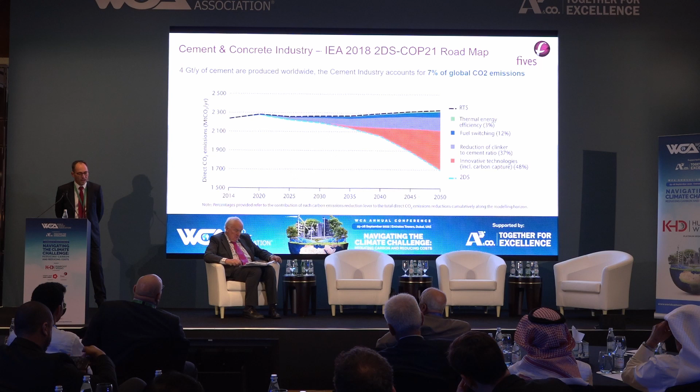I'll share a survey done by the association that also splits CO2 emission savings into families. One is operational excellence, including energy efficiency. Another touches the product portfolio, where we're a little concerned about market acceptance - we could smile about the reddish cement question around the use of calcined clay. But this is the product portfolio, and it's variable depending on the area. Then there's the use of alternative fuel and possibly waste heat recovery. All these categories provide significant abatement and are all existing, available technologies.

Looking at Fives' technologies, we've divided them into two categories. This one is called short term, mainly because it has already been applied for more than 15 years in many cement plants - we're talking about pyroprocess line efficiency. The last 50 years or more have seen wet lines converted to dry lines, and to dry lines with preheater and precalciner, so there's still room for improvement in this part of the plant.

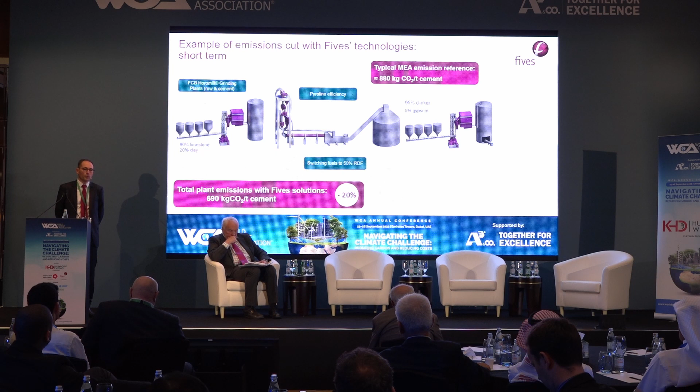There's also fuel switching - in this calculation, it's based on 50% RDF. Of course, there's the matter of availability and competition between recycling and burning, but the figure used is 50%. And grinding technology to save energy and water, and possibly increase the cement-to-clinker ratio. With this easy, already existing technology, more than 20% abatement is possible in the cement plant. What I'll introduce today and detail further in the second part of the presentation is the more recent development we've specifically made for these CO2 abatement ambitions.

One on the bottom left is the clay calcination. I will go more in detail, but this allows us to produce what is called LC3, cement containing only 50% clinker, so a significant saving in terms of CO2 emissions. Also, the evolution of pyroprocessing technology increases the possible amount of alternative fuel use in a cement plant, whether biomass or RDF.

And last but not least, concrete recycling. It's a business that is at the border between the cement industry and the construction industry. Nevertheless, there are applications that are more adapted to the cement industry, and I'll tell you why.

But with all these technologies, at the end of the day, we offer today the possibility to reach almost 300 kilograms of CO2 emissions per ton of cement, which is a strong push in terms of CO2 emission reduction. We say 65%. So you have a very large panel of solutions you can implement step by step, with different levels of effect, but at the end of the day which will allow reaching this ambitious target, with a limited amount of CO2 to dedicate to these new technologies that are known to be costly and energy intensive.

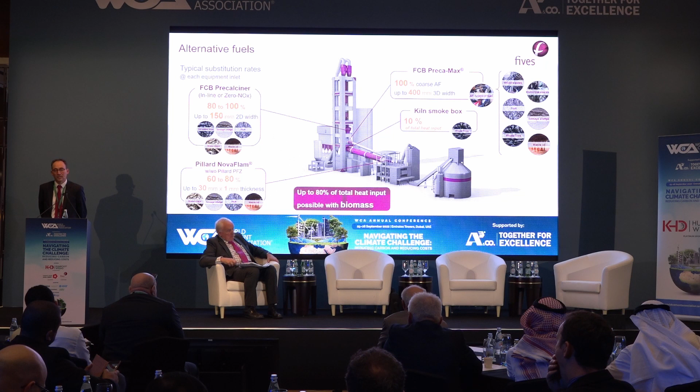Instead of shredding to 20 or 40 millimeters, you can put 400 millimeters in your cement kiln line, with an important substitution rate, because all these technologies together can allow up to 80% total substitution rate. But it's clear this also depends on the availability of your alternative fuel. The technology is there, that's the message.

Then, more recently, clay calcination. It's not completely recent, because FCB did a flash calcination plant in the 70s, so in terms of technology it's not really new. The use of kaolinite is also practiced in the construction industry for decades, but now this field comes into the cement plant.

So what we have done at FCB is give preference to flash calcination in comparison to calcination in a rotary kiln, to have a sharper control of the calcination degree, and thus doing grinding before calcination.

One of the significant advantages—we heard yesterday that we have huge amounts of clay available worldwide for calcination and to introduce in our cement. But clay has different qualities; some are more appropriate to calcination and to making cement, some are less.

Flash calcination gives you a wider span of possibilities because, having sharp control on the degree of calcination, you avoid starting a reaction of foreign or non-desired components in your clay that could be detrimental to the quality of your calcined clay. That's why we went to flash calcination.

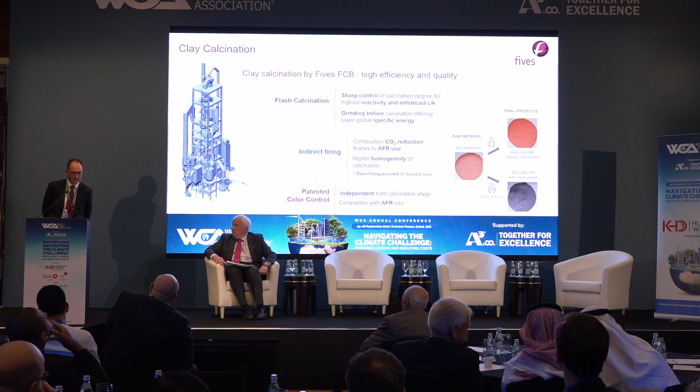So the last item is concrete recycling. We talked this morning about circular economy. We are typically in the circular economy, because the cement you produce is used to make concrete, and if you recycle the concrete, you get high quality aggregate to make concrete again.

You have sand to make concrete again, and you have cement paste that you can introduce into your cement kiln, within limitations given by the chemistry of your raw mill, but it can also be used as an additive for cement. The benefit is first that the sand, the 125 micron to 2 millimeter fraction, contains about 20-25% cement paste.

is also applicable here, and it's very virtuous because you have 100% recycling of concrete, and you can use this material either in your process or as CO2 absorption in a carbon sink. All these technologies are available and already used for decades, but just recently applied to the cement industry.

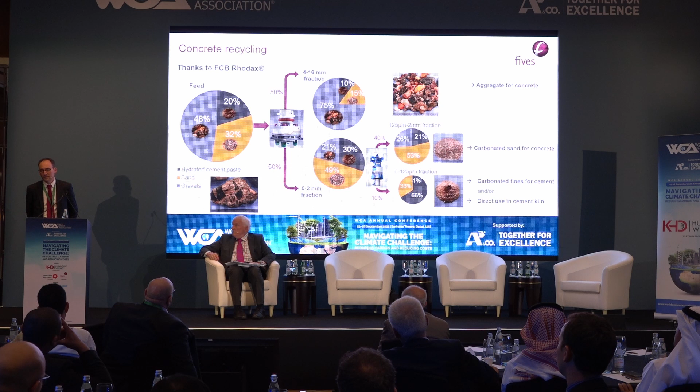Here we are. Merci beaucoup. Thank you very much indeed. You're welcome.

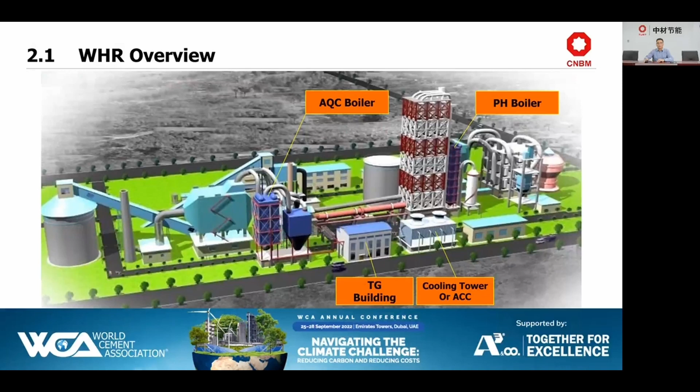Here somebody may ask, what is WHR? In the cement plant, one typical WHR system normally includes a PH boiler in the preheater side, AQC boiler in the cooler side, turbine and generator department, cooling water tower or air-cooled condenser, and chemical water treatment, etc. The waste heat source normally includes the waste gas from preheater outlet, the hot air from cooler vent, the radiation heat from the rotary kiln, and the waste gas from the bypass system, if any.

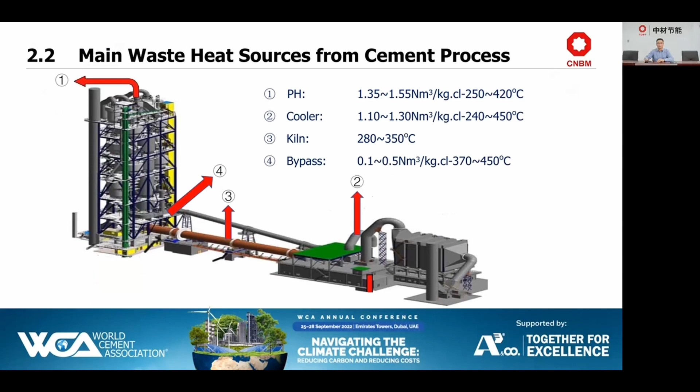About WHR technology, there are two main categories in the market. One is the steam Rankine cycle system, we call it SRC, and the other is the organic Rankine cycle system, we call it ORC. The working principle is the same, both based on Rankine cycle but with different working medium. For SRC, the working medium is water and steam, suitable for plants with rich water. For ORC, since the working medium is thermal oil and organic fluid, it is especially suitable for plants where water is in shortage. For cement plants with flue gas temperature less than 400 centigrade, the efficiency of both is almost the same.

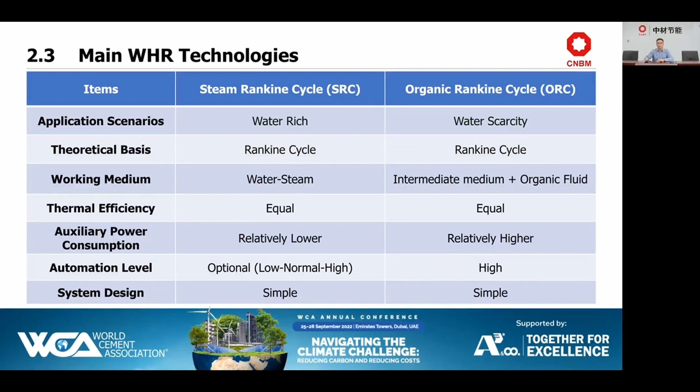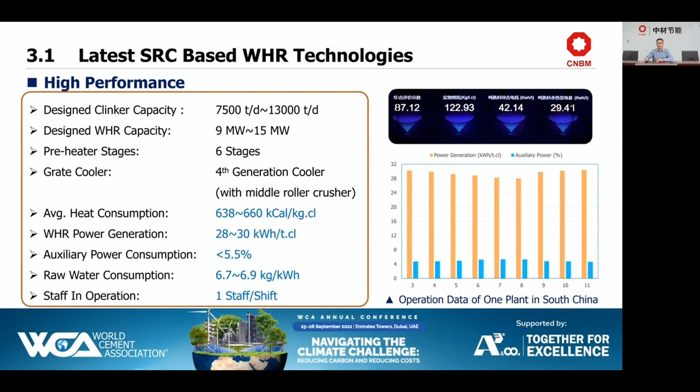Following, I will introduce some features of the latest SRC-based WHR technologies in cement plants. High performance: if the kiln system adopts a 6-stage preheater, as we know, the heat consumption is very low. Under such conditions, the power generation of the WHR system designed by us can still reach 28 to 30 kilowatt-hour per ton of clinker, and the self-power consumption rate of the WHR system can be less than 5.5%.

High-level integration: in our latest WHR system, the AQC boiler is one part of the cooler and shares the same foundation and platform with the cooler department. The AQC boiler adopts the bottom area inlet, directly arranged above the grate cooler and connected by the middle tapping solution. Compared with the last generation WHR system, the boiler inlet air duct becomes shorter, so the temperature loss and pressure drop get smaller. The PH boiler intakes the waste gas from the preheater outlet and operates in series with the kiln system. The designed exhaust gas temperature can be less than 180 centigrade and controllable.

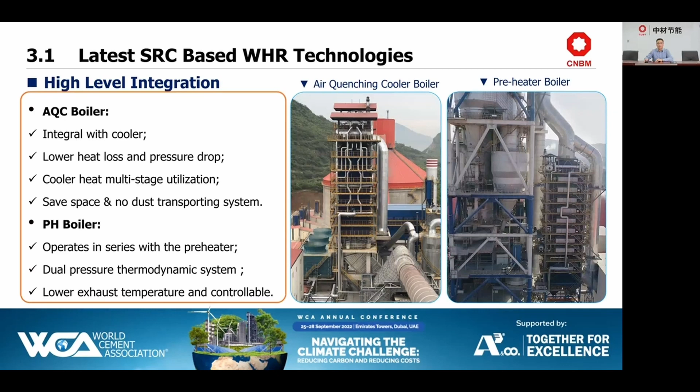High-level intelligence: advanced wireless communication technologies have been utilized in the system, with which we could realize remote big data analysis and management. A large number of HD cameras are equipped to monitor the whole WHR system in an all-round way constantly, with which we could give operation and maintenance suggestions timely.

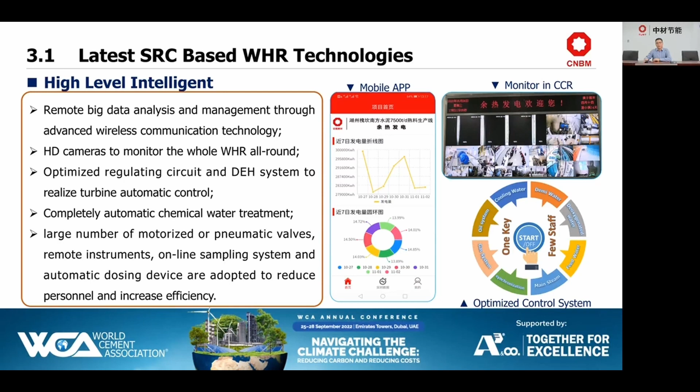Through optimizing the regulating circuit and the DEH system of WHR, we could realize automatic control of the turbine. By utilizing automatic chemical water treatment, large numbers of motorized or pneumatic steam and water valves, remote instruments, online sampling system, and automatic dosing device, we could achieve less operation staff and high system efficiency. So only one staff per shift is enough for the entire WHR operation.

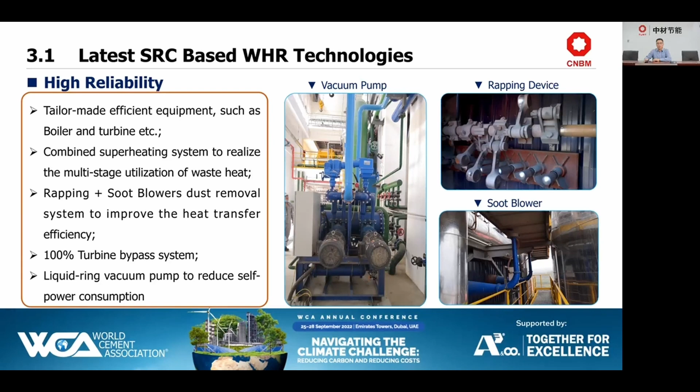High reliability. Considering the low gas temperature from the 6-stage preheater outlet, we adopt combined superheating technology in the AQC boiler, using hot air from the clinker cooler to superheat the low-quality steam from the PH boiler. In this way, we realize multi-stage utilization of waste heat resource and effectively improve thermal cycle efficiency. At the same time, high-quality equipment and suitable dust removal methods can ensure safe and stable operation of the WHR system.

Now let's come to the ORC-based WHR system. As mentioned, the working mediums are thermal oil and organic fluid, which is more suitable for water scarcity areas. Normally, the ORC process includes 3 parts: the first is waste heat recovery from the plant by thermal oil, the second is heat exchanging between thermal oil and organic fluid, and the last is the organic cycle for power generation.

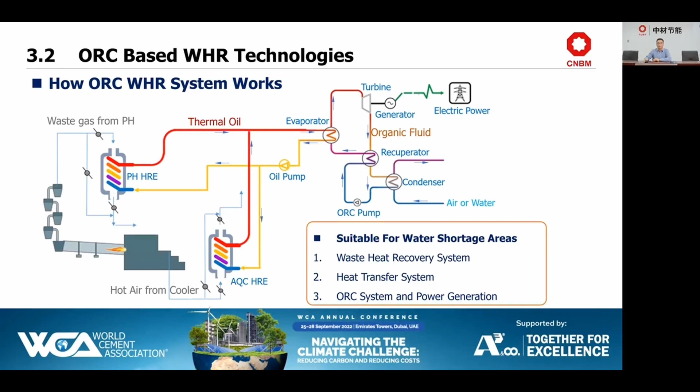Based on the physical parameters of organic fluid, different from the SRC system, there will be no risk of blade erosion. If ACC is applied for the cooling system, no water will be consumed for the entire WHR plant. Another feature of ORC is that it can recover lower quality waste heat, for example gas with temperature less than 150 centigrade. So whatever the waste heat quality or the water situation may be, we can provide the best WHR solution accordingly.

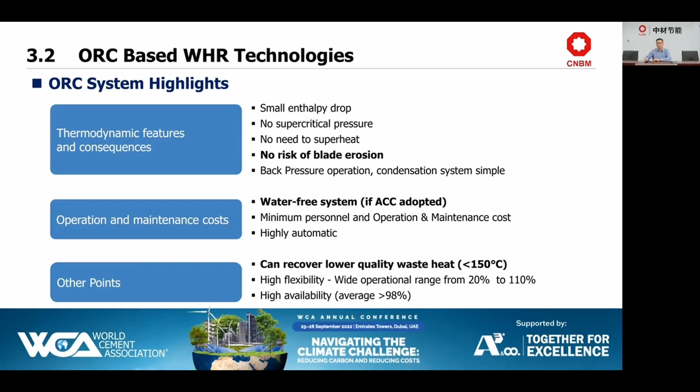In future, we will try to apply more and more green and low carbon technologies such as solar energy, wind energy, geothermal energy, and energy storage, etc. Our final goal is to realize the balance between power supply and the electricity user through a smart energy management system. That's all my report. Thanks very much.

Tao, thank you very much indeed on using waste heat to generate power. Now, would anyone like to come back immediately and just check with him on any of the detail that you heard or saw in those very comprehensive graphics? Please, let's get the microphone to Ian. Anyone else? Do I see any other hands going up? Ian, of course, spent many years in China. Anyone else want the microphone?